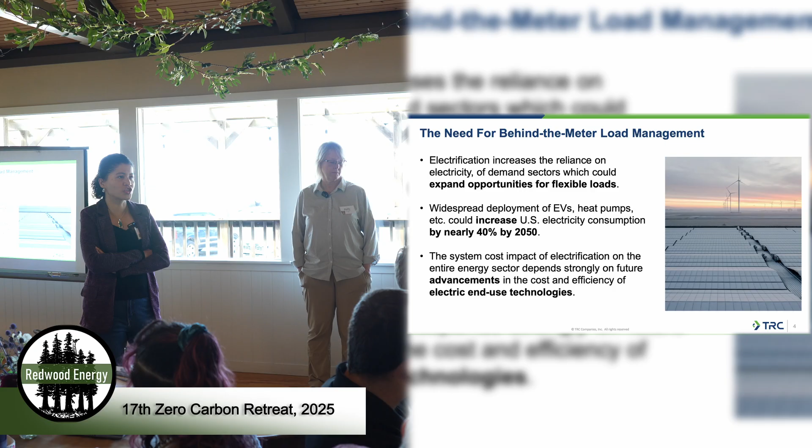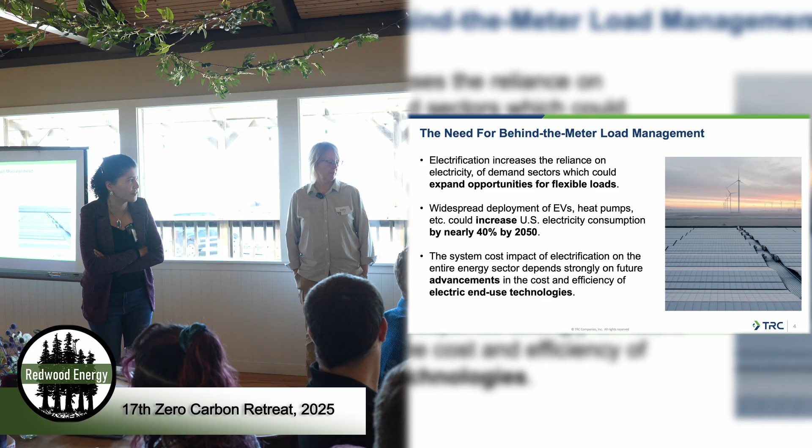Advanced technologies that are flexible, or that allow flexibility, load balancing or load management, are going to be critical. Not just advanced technologies, but having those technologies cost effective and ways for scalability is another question we are trying to solve.

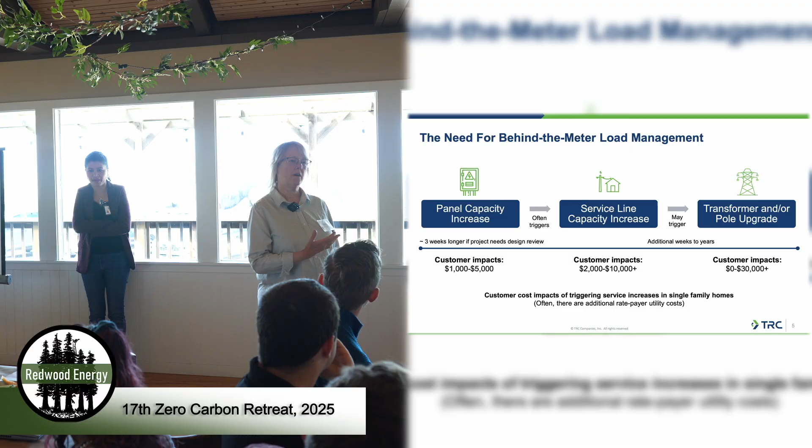I guess this is the first pilot. I'll pass it on to you because that gels very well. Let's just put some numbers on the potential costs or savings, depending on how you look at it, if we do things smartly when we electrify behind the meter, versus if we just do it business as usual.

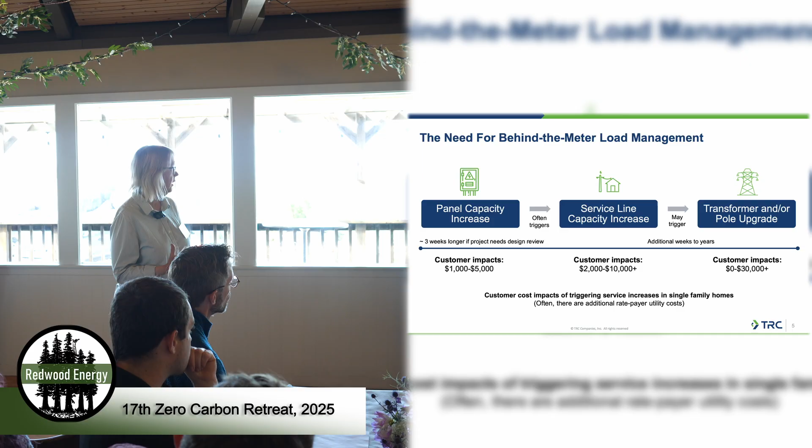If somebody's told, oh, I want to electrify my home, you need to upgrade your panel, it's going to cost the homeowner, if it's just the panel, up to $5,000 before they've even started electrifying anything. So that's expensive on the homeowner and often a deterrent.

But then sometimes the service coming into their home is not adequate. That can add another few thousand, and if you have an underground electric line, it's much bigger. It could even be $10,000 with all the trenching, and a lot of that is paid for by the customer.

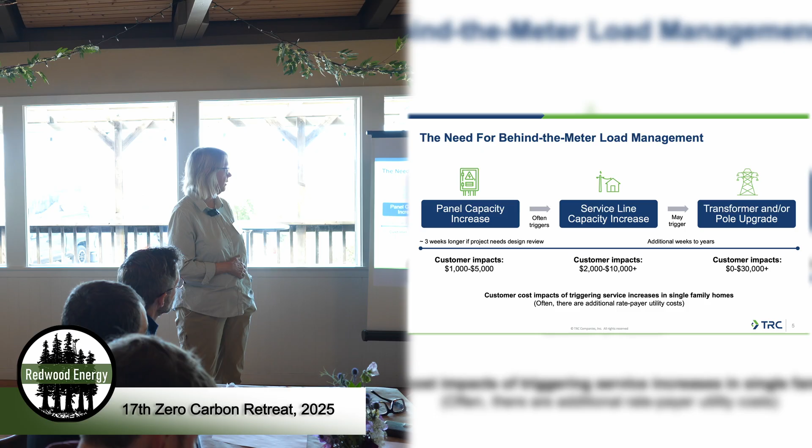But then if enough homes in a neighborhood do that, the transformer needs to be upgraded by the utility, and eventually the generation needs to be updated, and of course all of that gets sent back to the ratepayers. So these are some big numbers.

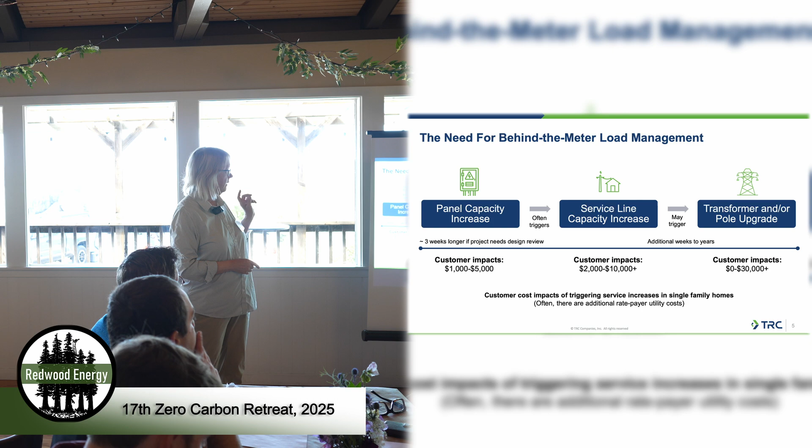So anything we can do back in the beginning to see if we can get electrification done without increasing the panel size is a very big deal.

So there's a bunch of us here, actually, working on a CEC grant program. Hi, Dylan. That is really pretty cool.

You may have heard of the Watt Diet. Redwood, of course, and Tom Kabat, and lots of folks have been using it. It's essentially a spreadsheet level tool at this point. The idea is can we take it to the next level and make it something that's more mature, more reusable by other folks who aren't as into the wonky details. And so there's a CEC EPIC program.

We have LBNL doing that part of it. And then there's a UI that sits on top of that that QuitCarbon is working on to really be the interface to that engine and make it more usable for folks, whether it's homeowners, contractors, whoever it is in the ecosystem. There's a bunch of field trials that we're going to be doing, and that's where TRC comes in.

We are leading the field study. There's 3 different pieces that we're going to be doing. We're currently looking at folks that have already upsized their panel and doing some analysis to see could they have avoided it and how much would they have saved if they had done that. The next phase will be to recruit folks that are still at 100 amp panels. That's usually the size that we try and see if we can maintain.

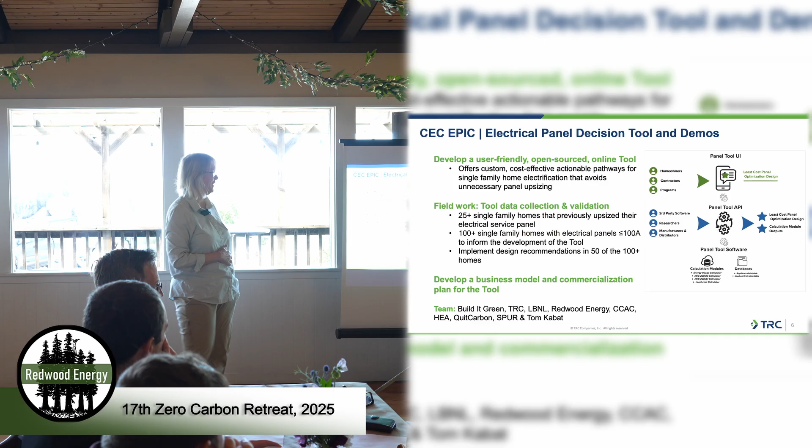And then we will down select about 50 of them to actually run this tool on their home and partner with them to decide to go ahead and implement the electrification measures and use it to test the tool out and see if it's working correctly and is able to predict correctly.

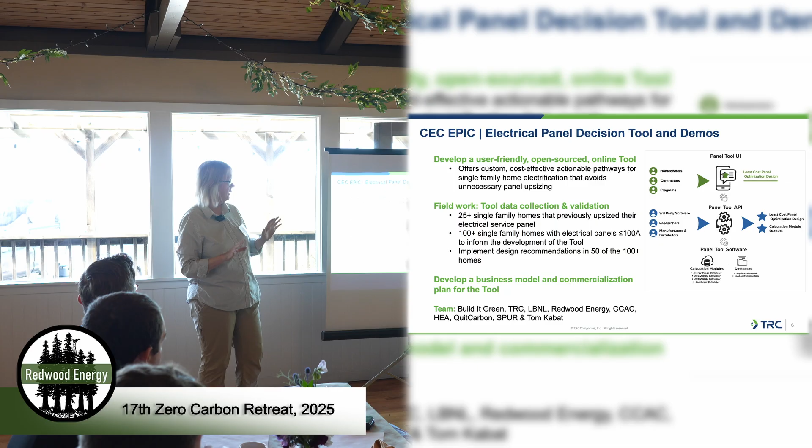Definitely lots of support could be used here in terms of identifying people across the state, especially outside of the Bay Area. Love the Bay Area, but we try to get a little bit more. Also in disadvantaged communities and such, and so we have some strategies around that.

But also, this grant doesn't actually pay for the electrification measures. So we have to figure out how to put a funding stack together, and with incentives starting to drop, suggestions, ideas are definitely welcome there as well.

And there's some pieces at the end where we're going to spread the word, make sure it's commercialized, set it up as open source so others can build on it, and it becomes a community-based tool. Next slide.

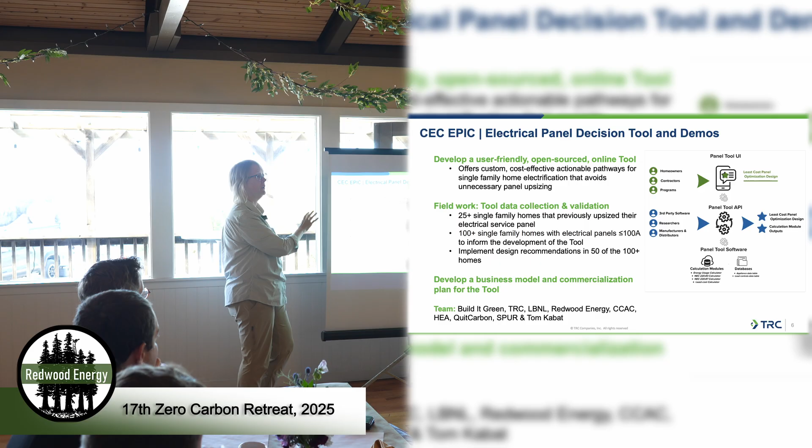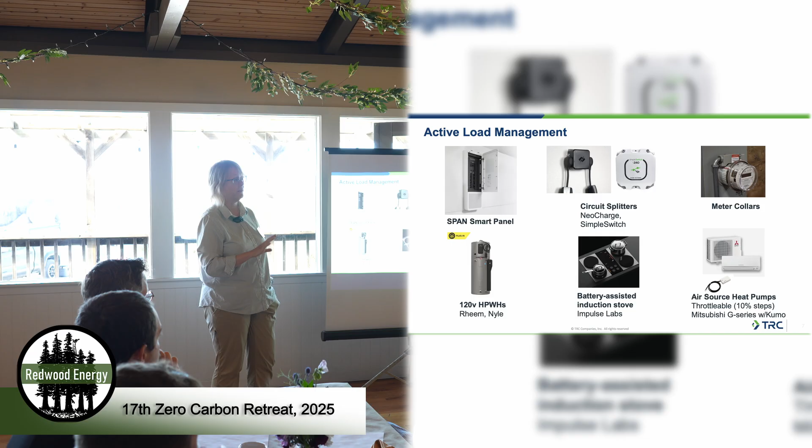So some of the measures we'll be using, folks may be familiar with these. We have a lot of match funders that are going to give discounts on some of the equipment. Discounts are good, but somebody's still got to pay the rest of it. So using smart panels, the smart splitters or the circuit splitters are terrific.

The meter collars, assuming those get approved for the different IOUs, and then some of the more efficient, power-efficient equipment. Folks may be familiar with 120-volt heat pump water heaters, the induction stoves that only need 120 volts, and of course heat pumps. We love heat pumps.

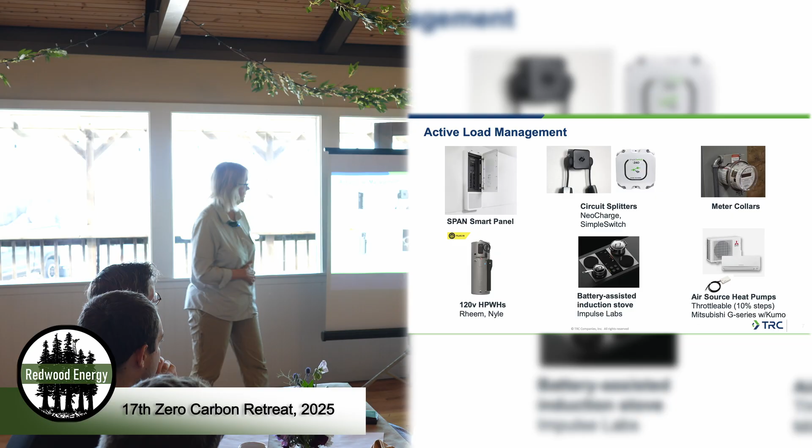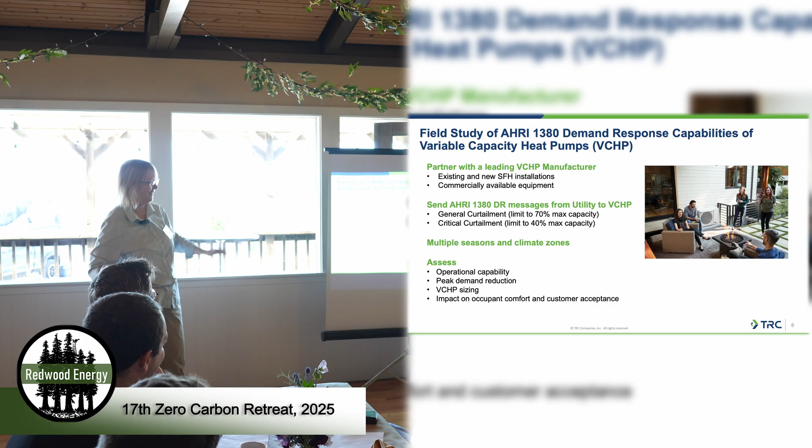Okay, so that's one project that I'm working on. I'm helping to lead the field trials there, so that's kind of cool and fun. Different project. Yeah, there's a totally different thing that I'm also working on.

I don't know if folks are familiar with AHRI 1380, but this is a protocol that's been put together for demand response for variable capacity heat pumps. I'm actually somewhat new to this industry, so I have to laugh. The big innovation is that they can do high, medium, and low instead of just on and off.

Because most heat pumps and most HVAC systems are on or off. A furnace, it's on or it's off. So variable capacity heat pumps can do graduated, high, medium, low.

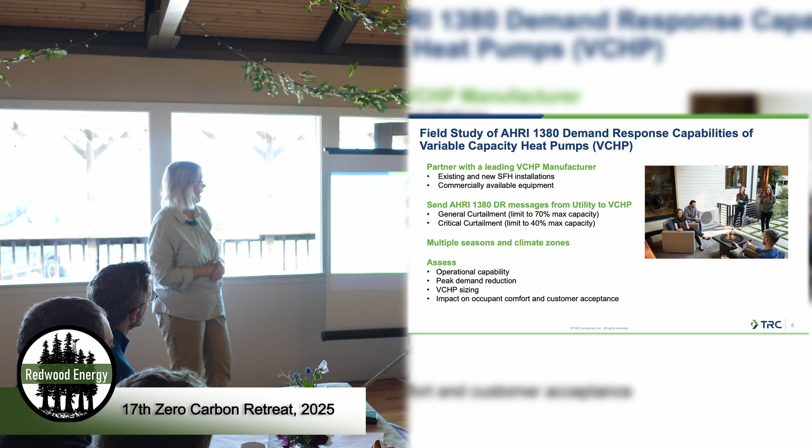And so this is a protocol where the utility can actually communicate with the heat pump and tell it, we're in a high peak period right now. Can you drop down? So this is a field study with a particular heat pump manufacturer and one of the utilities in the state to work with either existing installations or some new installations in single-family homes and actually simulate these flex events. Simulated only in the sense that it's not actually a peak demand period. It'll be the real messaging going back and forth.

And then doing measurements and seeing how much was actually saved and what the impact on comfort is.

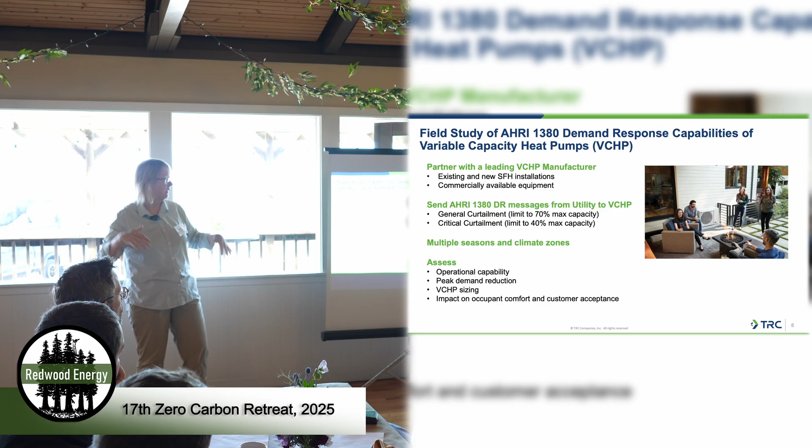Because there's a big issue with retention in these programs. When it's a peak heat day and you've signed up for one of these programs and they just turn off your AC for 2 hours, that's a big ask. But if you can just turn it down, would that be better? It's still running, you're still getting something, but if you get enough people, it can actually make a difference. So they have 2 different levels.

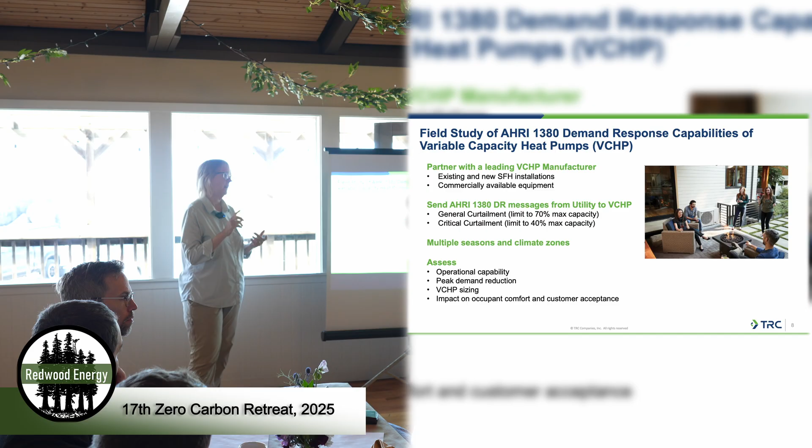We're trying both of them, and we're doing some measurements over a period of several major seasons so that we can see both hot areas and cold areas, and both how much energy did it actually save, and what are the impacts on comfort and retention for these programs. So this one's kind of fun too.

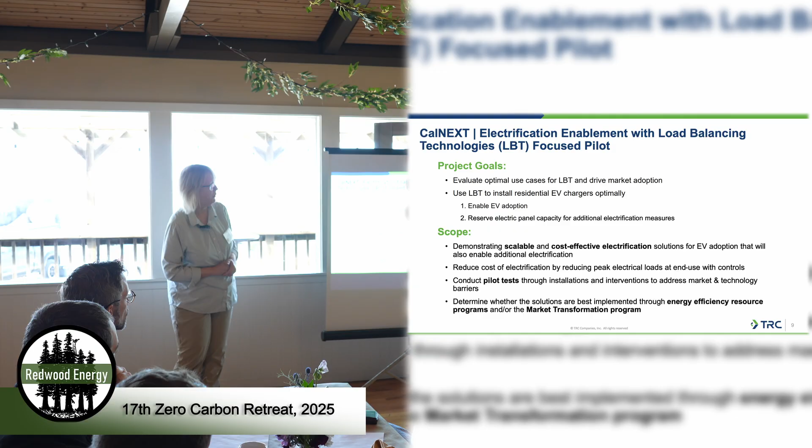Next might be back to Amruta. Yeah, all right, so...

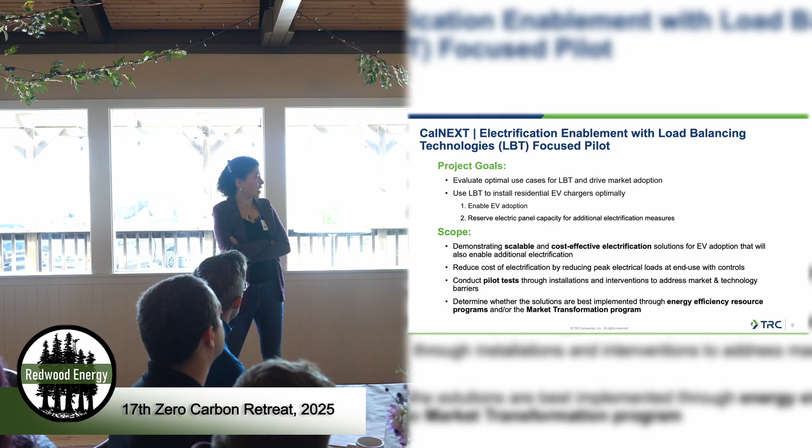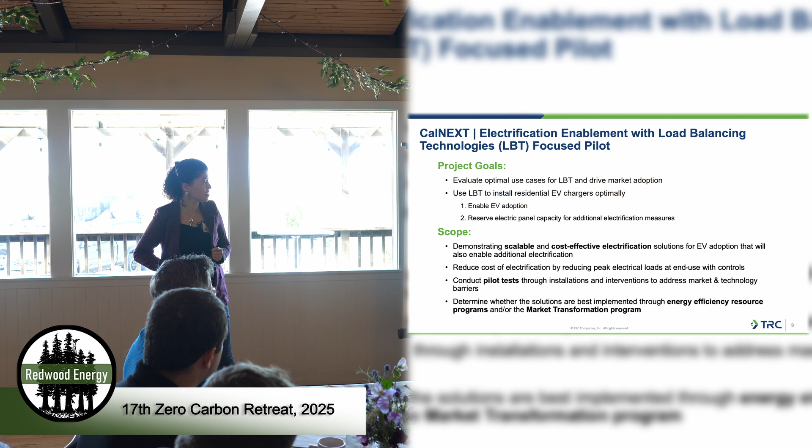In this particular pilot program, that's CalNext. I don't know if any of you know of CalNext. CalNext is a statewide, California-wide electrical technology advancement program that TRC is partnering with Energy Solutions and some other partners on implementing. They do have a focus pilot as one of the streams, as there are research programs, some demonstration programs. Focus pilots are more market transformation focused, where you are looking for ways, what are the current market barriers, and you're addressing those through the demonstrations.

And the goal of this pilot program, which is electrification enablement with load balancing technologies, is again how load balancing technologies or load management can play a role in terms of electrification. Let's say cost-effective electrification, that's the biggest piece.

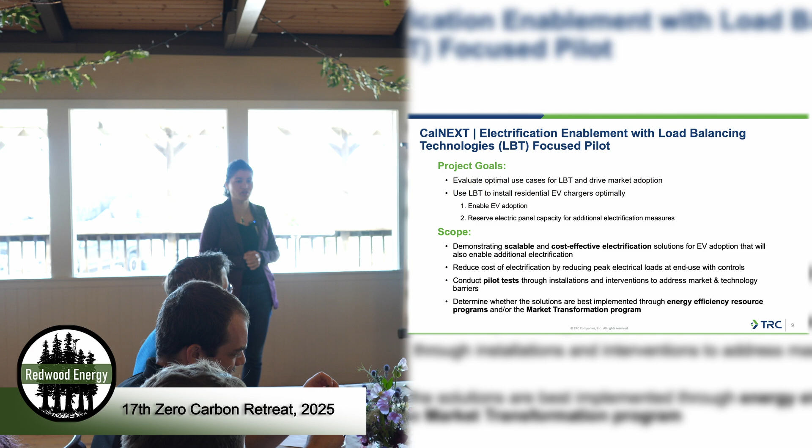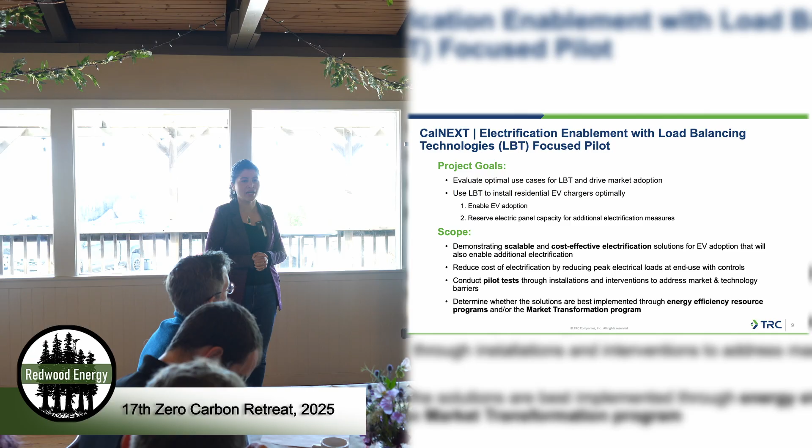And we are targeting EV because EV is one of the highest loads for customers. If you look at their panel, between all the loads, EV would consume the majority of your panel capacity. So we are looking for ways like how can you use these load balancing technologies and electrify optimally in addition to your electric vehicles.

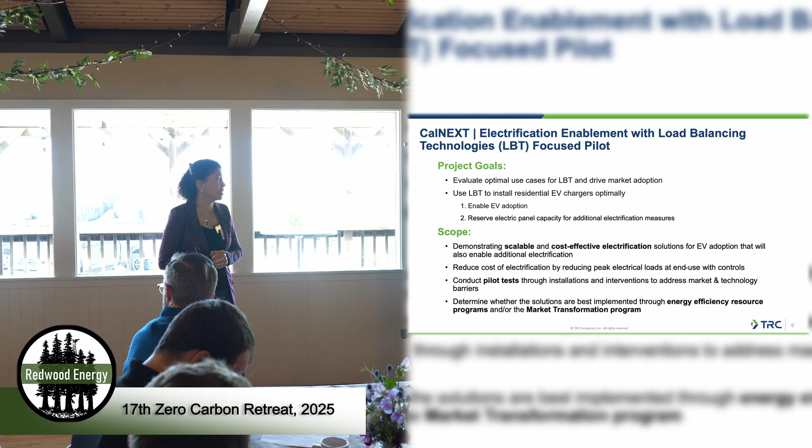And many of us are working on that project. So the objective is to enable EV adoption and do additional electrification using load balancing technology without upgrading your electrical infrastructure.

So you do an EV adoption with a washer dryer, or with a heat pump water heater, or with a heat pump, and what are those different technologies available, and which market segment would it support. So there is no one size fits all.

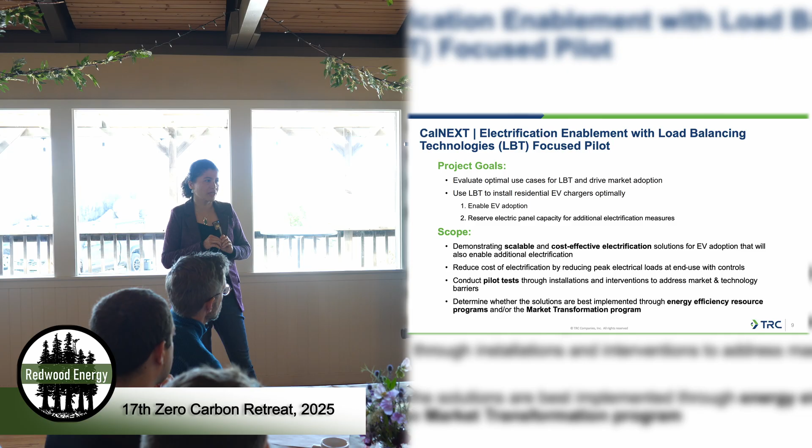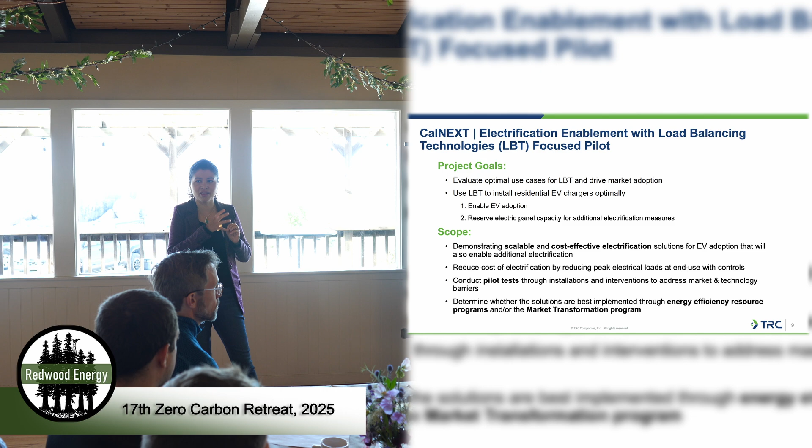So we are working with 7 different manufacturers, from smart panels to circuit splitting to circuit pausing to meter collars. And of course, these are all great technologies for the right market segment, and that's the segment we are trying to address through this focused pilot. Next slide.

And these are the different load balancing technologies. We are targeting circuit sharing, pausing, meter collars, smart breakers. Smart panels are great, but we're also trying to figure out the cost effectiveness of those.

And there are some newer manufacturers who have smart breakers or smart relays that you could use without upgrading the panels, which can be more cost effective. So that's another approach that we are testing. If you go to the next slide.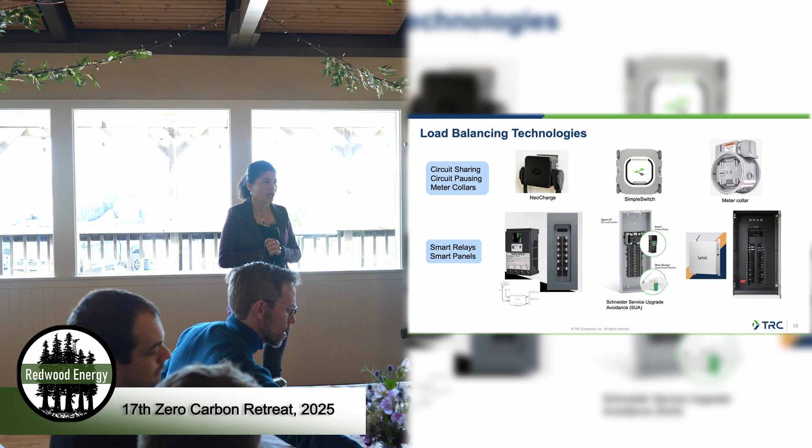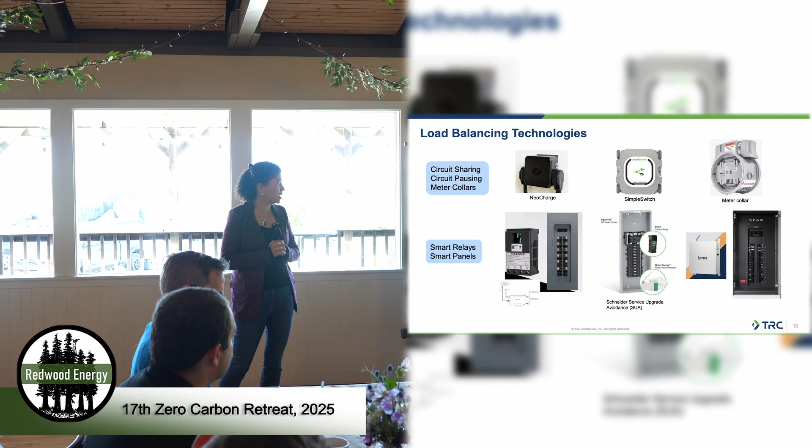So what's unique about this program is we are trying to address all of the end uses in a home and orchestrate them to meet with the utility's total system benefit, or the infrastructure costs. Think of it as time of use or the prices to devices, but we are identifying a customer load management program model that would be ideal for PG&E for future programs.

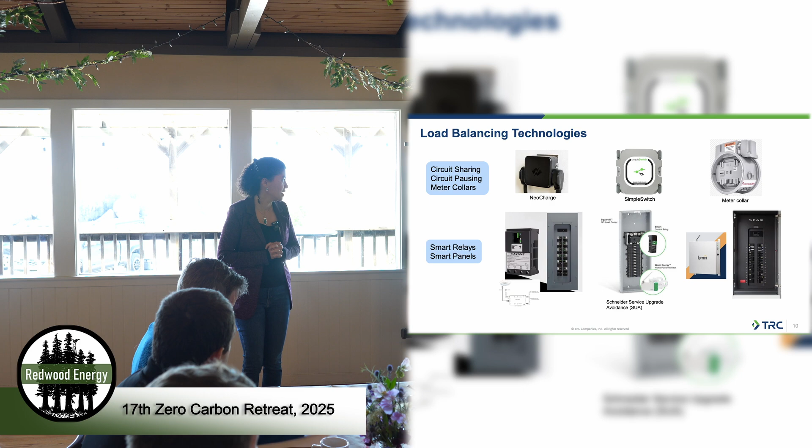We are looking at about 300 homes, and these are going to be working with the owners of existing homes. We're targeting homes that already have heat pumps and heat pump water heaters, so energy efficiency measures we're targeting so that this program could be cost effective. But what we are trying to do in addition to that is making sure those are controllable, and we can work on orchestrating them through those controls.

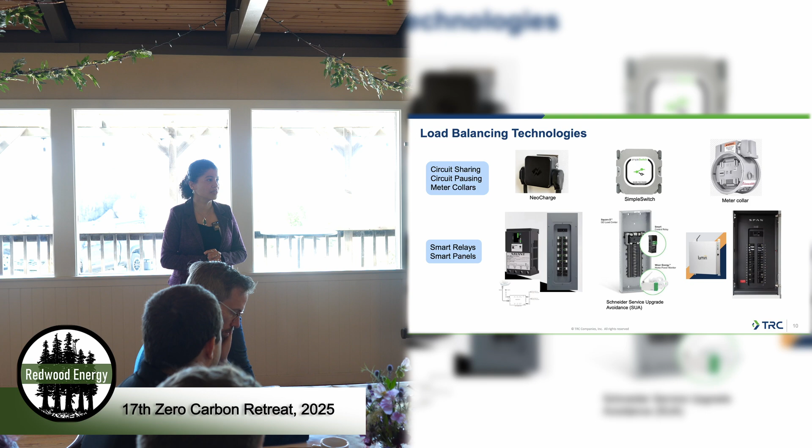So right now, some of the questions that we are trying to address are, who are the API platform vendors whom we can work with to orchestrate these different measures?

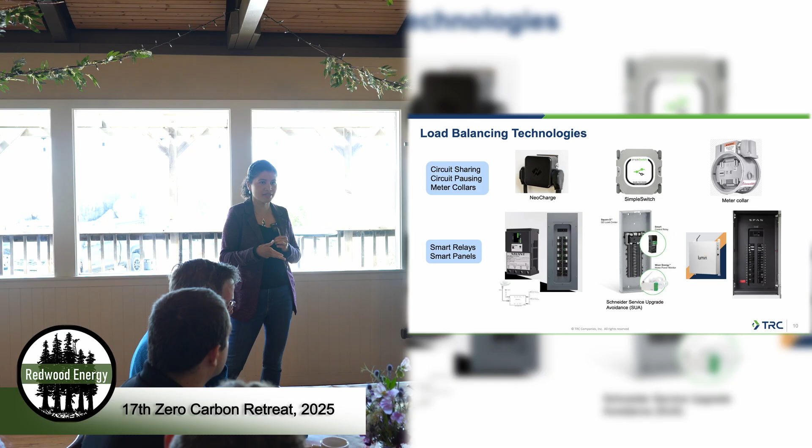Does a daily load shift make sense? So far, think of any load shifting project as more of a demand response project, and that's all event based. You have an event, the utility sends signals, and you are reducing. This is something we are trying to do on a very regular basis to see energy efficiency and load shifting benefits on a sustained basis. I think that's the last slide.

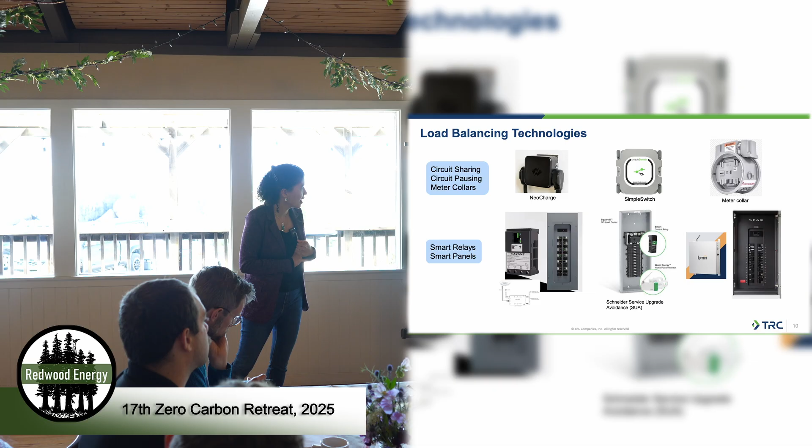Yes. Good job. Yay. Okay, so which one's your favorite? Which program? The 100 amp panel. The panel tool. The panel tool.

What are the challenges, Stevie? Because we are trying to orchestrate all of the end uses, and the technology is so cutting edge that nobody has done that before. So we're trying to identify, is it the DERMS platform vendor? But that might be too expensive, and utilities don't want a DERMS platform vendor. So then is it an API platform vendor? And then who are the technologies, are they controllable? With these 300 homes, they might have controllable devices, or might not.

Okay, yeah, those are real challenges. Yes, Tanya had a question?

I worked with Emerald back in 2016 on a HEMS program and tried to commercialize it at the residential level. That type of optimization, the cost effectiveness was never there. It was too difficult to integrate all of those systems for something like a ceiling fan. The difficulty was, you go to a homeowner from the utility perspective, where we can aggregate at scale, and say, do you participate in our Flex Time Rewards program? One residential homeowner said, is that the program where you pay me $5 a month to turn off my HVAC on the hottest day in summer? I said, yeah, that's the one. She said, F no, why would I do that? I want my house to be cool. But for us, when you aggregate that across our utility, it was literally the most money you could pay for a megawatt. So I was going to ask, at what point do you assess, okay, we could control everything, but what really is cost effective? What is the pathway to cost effectiveness, or what is the right segment, go-to-market strategy?